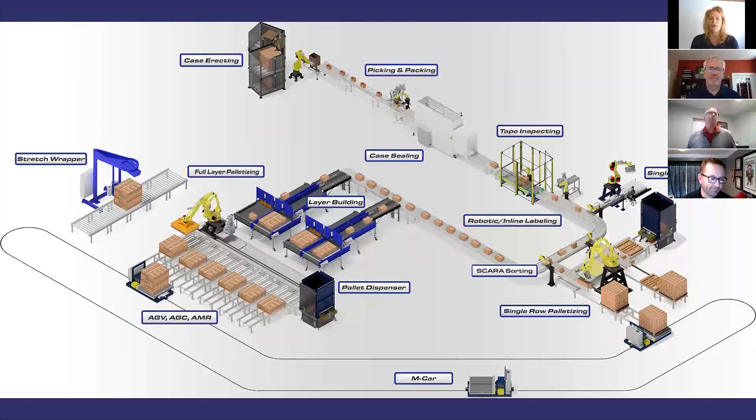I'm going to turn it over now to Jim Skelding, and he is going to explain exactly what end-of-line solutions are. Just want to start out with the definition. What exactly is end-of-line automation? End-of-line automation is the assortment of machinery, equipment, and software that are integrated to complete the shipping package before the final transportation of the goods. Typically, the process begins immediately after the individual product is made, filled, or converted.

Available on our website at Motion Controls is this interactive web page that you're seeing on the screen. We're going to start up in the left upper corner. We start out with robotic or traditional case or carton erecting, then go to each picking or case packing, then do case sealing. From there, you'll see our patent-pending robotic tape inspection, inline case labeling, or check weighing. And here is where any other quality control or customer-specific processes could be implemented.

From there, we show a single line palletizer cell for one product, one pallet, robotic case sorting, single row palletizing with pallet dispensing. Following through to the center of the screen, you see another complete system where we have full layer building and palletizing with a palletizing robot on a rail that allows us for multiple palletizing positions and sorting by SKU or order. Finally, the pallet loads you'll see are shown being transported by several different vehicles: AGVs, automatic guided vehicles; AGCs, automatic guided carts; and AMRs, autonomous mobile robots, which allow you to transport the pallets or the unit loads from the pallet wrapping system then out to the shipping docks or into the warehouse. Any or all of these solutions can be integrated into your process to increase throughput, eliminate labor issues, and reduce costs.

So now I'm going to turn it over to Earl for our first topic. Go ahead and take it away, Earl. Thanks, Jim, and thanks everybody for joining us. Just looking at the list of attendees, I see Riz is out there. You better be nice to me. This is my first webinar. So yeah, let's get on with it.

First thing we're going to look at is a trend that we're seeing more and more of, and it's basically a way to increase the utilization of robots, specifically palletizing robots. So we've got these multi-use robots that are not only palletizing finished cases or bags or product, but also doing some upstream work. In this case, we're handling rolls off of a winder, moving blanks into a box folding station—some automation that we've designed and built—and then placing the roll into the box. An optional tape roll can be added to the package.

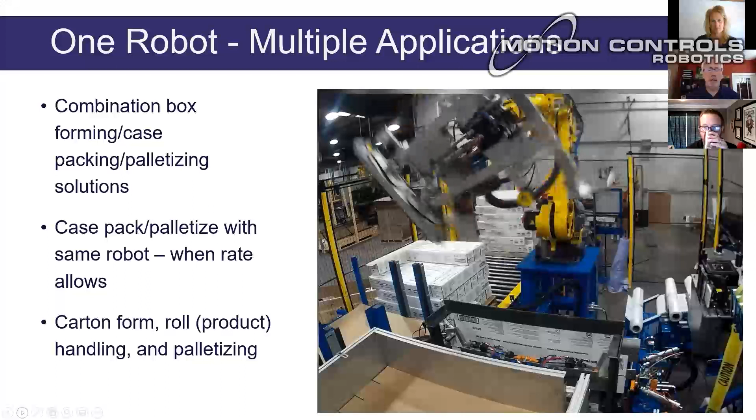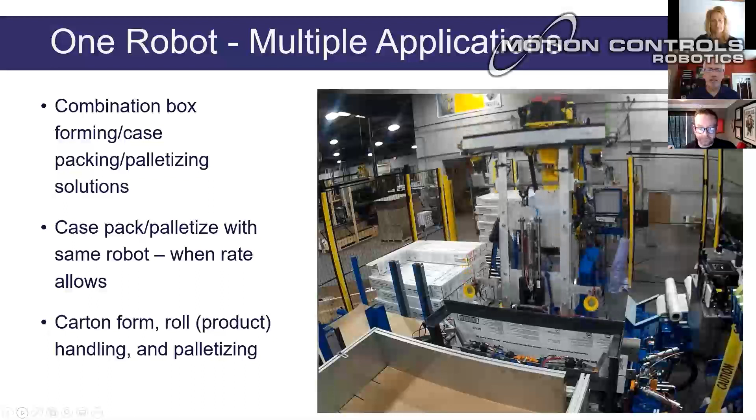You've got a multi-purpose end of arm tool that can handle blanks, handle rolls, and handle the finished carton. So when cycle time allows for it, we've got the ability to use that robot for multiple purposes. I think this takes some design and some thought, but we're going to be seeing more of this type of thing in the future.

Tray erecting, as the big box stores are demanding point of use or point of sale packaging right off of pallets. We're seeing more and more where our customers want to have trays built, or pallets built with trays and tier sheets. Here we've got a robot that can build the tray and then go ahead and stack product into the tray.

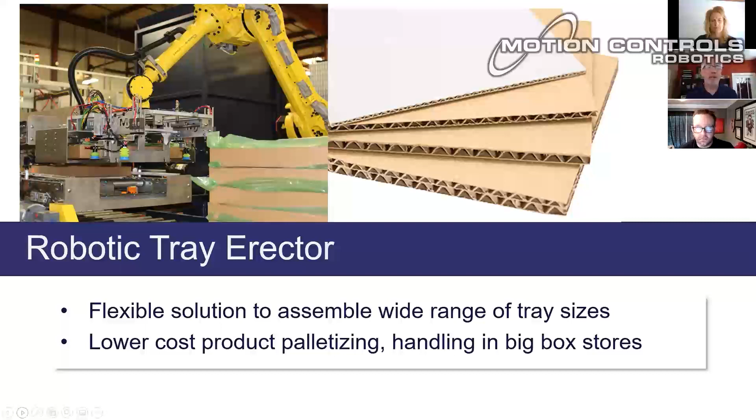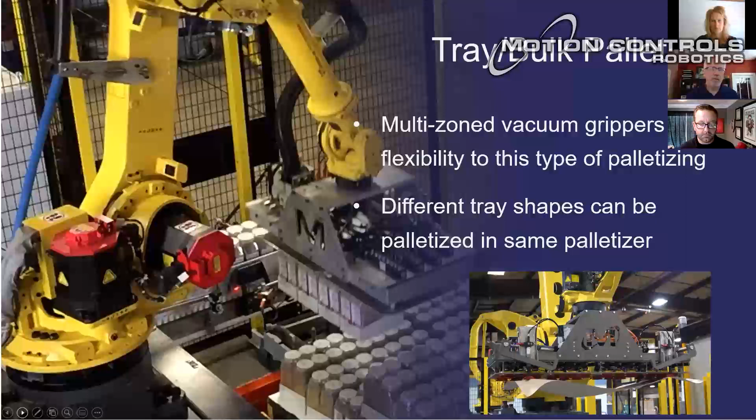Along those lines, for flexible tray packing, we've been designing end of arm tools with zones on them. The zones allow different configurations of product, pre-wrapped product, to be packed either directly onto tier sheets or onto larger trays. In this instance, this robot has the ability to handle 2x4 product arrays, 2x6, 3x4, 3x6. So depending on what the product is, the robot can be easily switched over from one configuration to the other.

Modular palletizers, we're seeing more and more of these. You might be seeing some advertising coming out recently with collaborative robots in very small, tight palletizing cells that can be moved around from station to station. Very nice little niche solution.

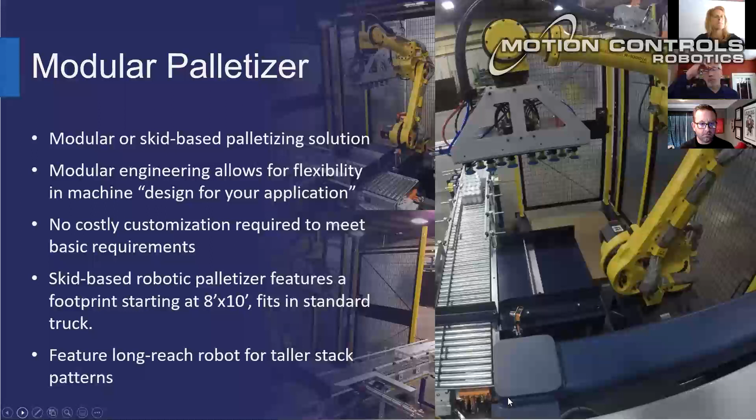These smaller, simpler cells tend to be limited in their capabilities. So you typically have lighter case loads, less variation from product to product. But in a really simple, elegant solution, these could be built onto an 8x10 or a 10x10 platform and then moved from line to line as your production needs require.

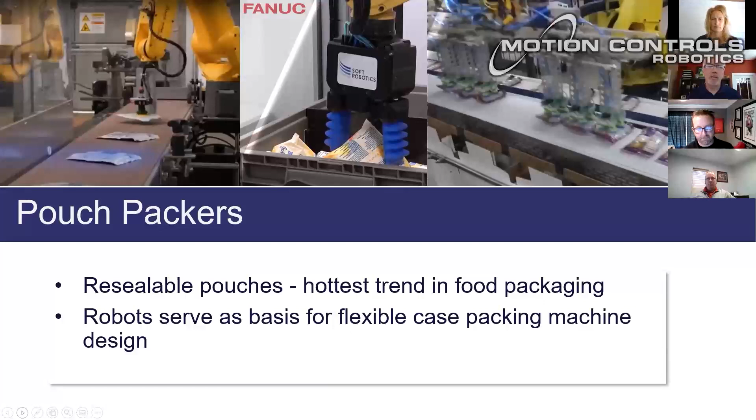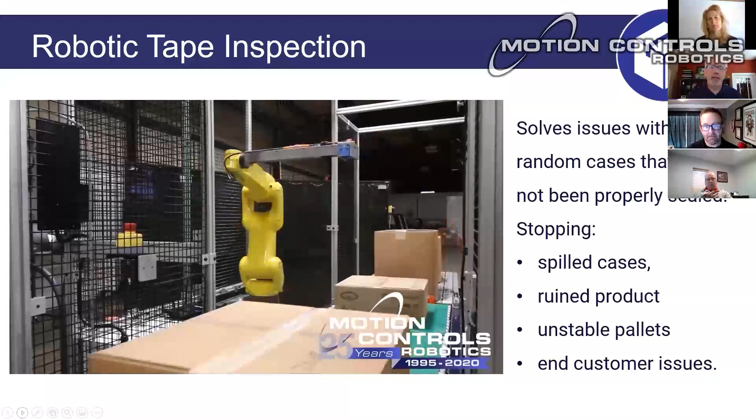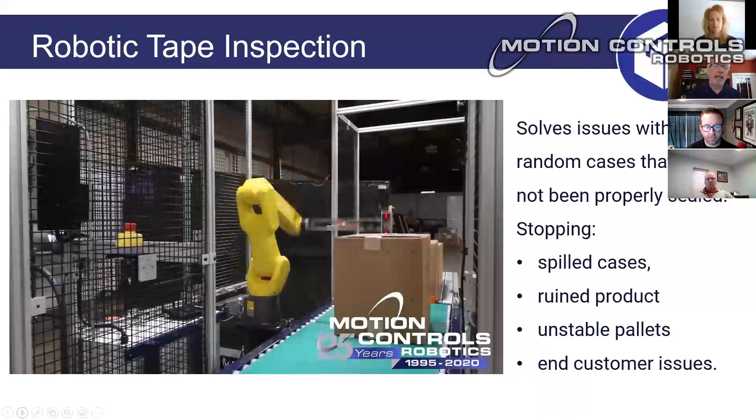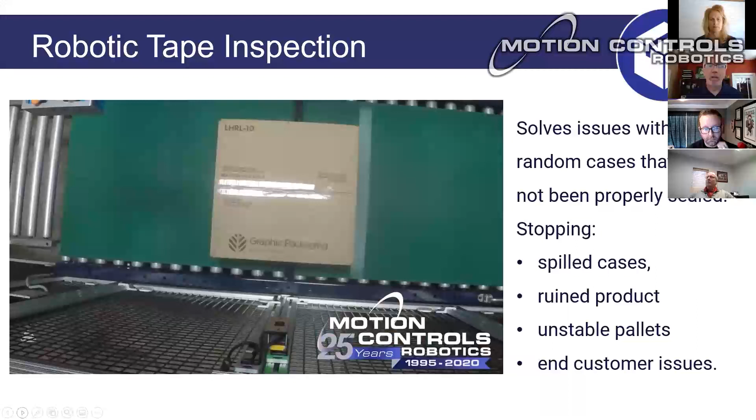Robotic tape inspection. We're going to be talking about central case packing here in a moment. One of the issues that has been a challenge over time have been cases that get to a central palletizing area from the production area with bad tape. Tapers are reliable, but they tend to have issues. They run out of tape. Occasionally they get gummed up, that sort of thing. So the worst thing that can happen with a central palletizer is to have one of these boxes come open, and then you've got a mess that stops your palletizing operation.

So here we have an inline robotic tape inspection process, very high speed, that watches for case orientation, and can check for presence of tape on both the bottom and top of every case that comes through the system.

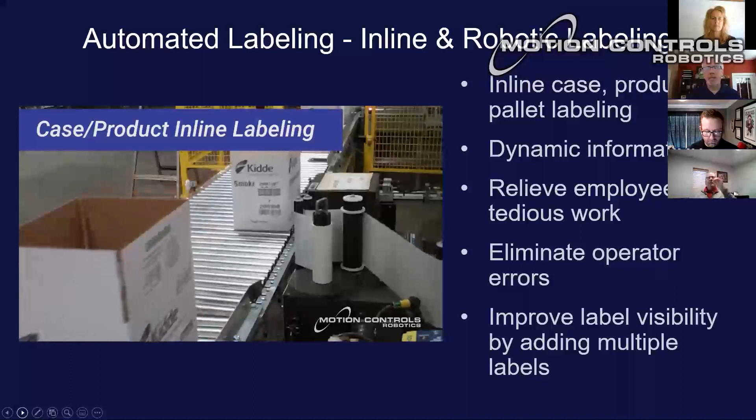Automated labeling, tremendous amount of activity happening in this area. Incorporating automatic labeling into a robotic palletizing cell or any type of robotic automation is pretty straightforward, and has helped our customers with 100% traceability and accountability for products being made.

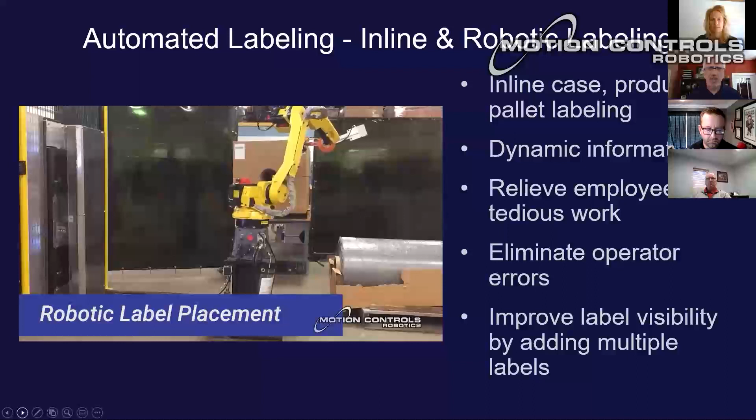In this instance, we're palletizing both boxes shown there, and then these rolls shown in the lower right. The same robot has the ability to go to the inside of the roll and places a label inside there.

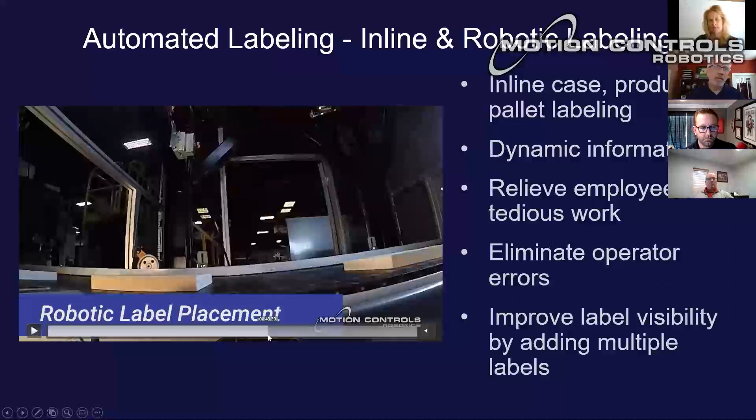And then if you could hold that just for a moment, Nicole, I don't know if you can go back or not, but the previous slide had an application for the previous video, high speed print and apply, and we're hitting upwards of 80 labels a minute on product going by that we're tracking visually.

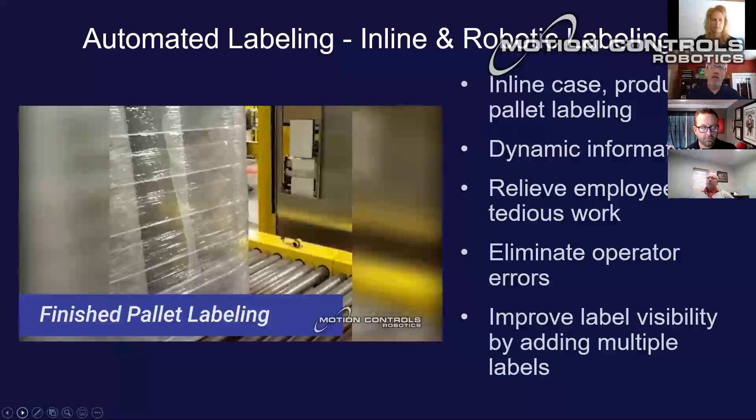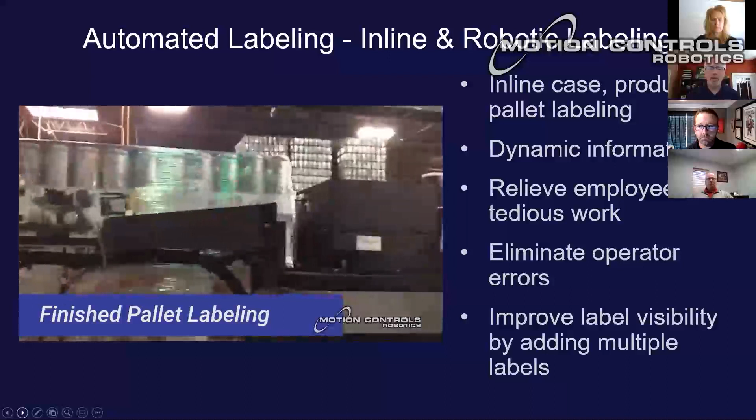Additional finished pallet labeling, again, all geared towards 100% labeling a product, eliminates operators, eliminates tedious work, errors, and so forth. Very high reliability operation with the automated labeling.

This is back to that high-speed labeling application. Here we had a customer with a very specific requirement for label orientation and location on a product. So upstream of this, we locate the product, then we print the specific label for that product and place it in the right place and to very tight tolerances.

So this was a consumer goods manufacturer, electronics, you might take a guess at, and they were thrilled with how accurately and how quickly we could get the labels on, and then verify that the label was there and that the label had the right content in a downstream vision operation.

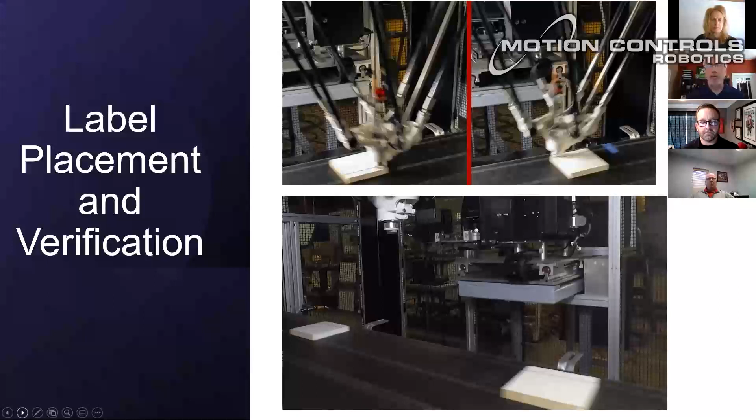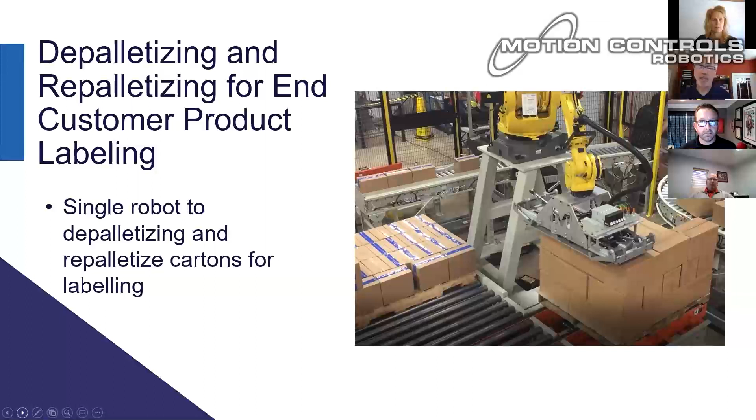Depalletizing and re-palletizing, again, getting more use is a trend we're seeing more and more, getting more use and utilization out of a robot. We have the ability to depalletize and re-palletize for specific orders and customers. And in a number of cases, customers have asked us to break down a pallet, apply labels to individual cartons, and then re-palletize for end customers. This is related to the online sales business that's been happening.

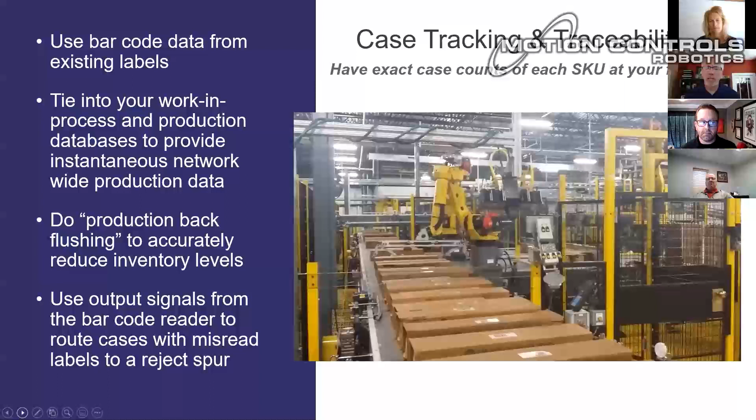Case tracking and traceability, mentioned this a little bit already, but again it's a natural fit for robotic palletizing applications. In this instance, we're using both Cognex and iRVision to track individual cases and locate them on the conveyor and feed information to these robots so that the correct robot knows which product to bring into a palletizing station.

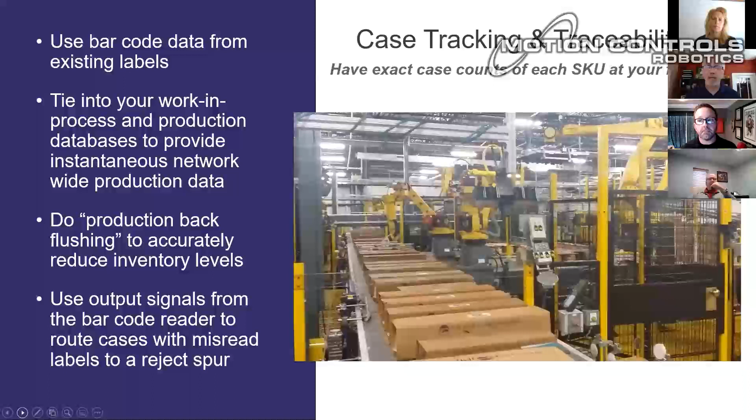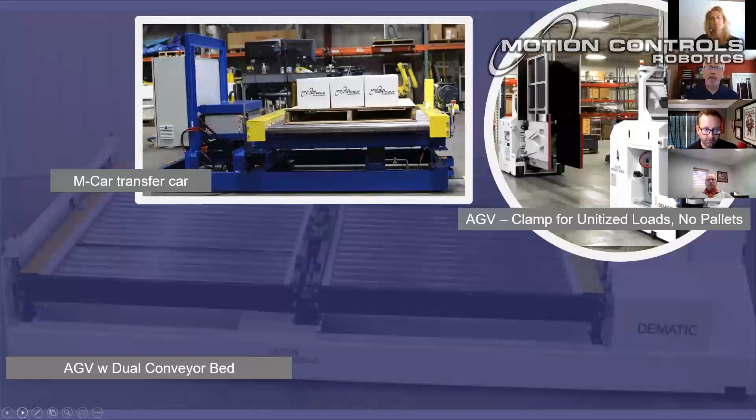Automatic guided vehicles - I want to talk about this a little bit. There's a new buzzword, AMRs, or automated mobile robots. As far as I'm concerned, these are all automatic guided vehicles. Back when laser guidance first got traction in the late 80s, early 90s, that group of suppliers wanted to call them LGVs instead of AGVs because they were laser guided. These new AMRs are vision-based and more slanted towards software layout rather than physical layout. But at the end of the day, they're automatic guided vehicles. So I just want to step through these real quickly.

The base T car, transfer car, has been around for ages. It runs on a rail, connects conveyor. The M car is a variation we've come up with, a derivative of a smart cart - a Jervis B. Webb automatic guided cart, branded as a smart cart. We have taken that and replaced the T car in many instances with a vehicle that has simple controls but can go around corners and turns rather than being tied to a rail.

The smart cart, or other automatic guided carts out there, are typically tape guided, sometimes inertial, sometimes laser guided, but a less expensive flavor of automatic guided vehicle. We're getting a lot of use in those for pallet handling and pallet transport of finished product from central palletizers to wrappers, or from wrappers to warehouse applications or warehouse areas.

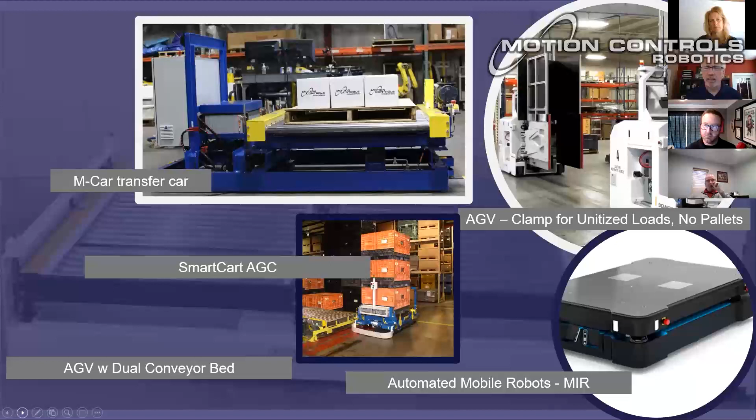And then finally, the AMRs. Again, it's a little different, a variation, but it's still a guided vehicle. And we're starting to see these - they're typically lower capacity units at this point. I expect them to grow and evolve into more full pallet handling type platforms. There's a lot of suppliers cropping up out of the woodwork, but I believe they will sort themselves out, and we'll probably see the traditional AGV suppliers that are out there today absorb this type of technology.

Sorting and layer building - I'm going to hand this off to Jim. He's got some words to cover on that.

All right, thanks Earl. What I'd like to start out with is an MCRI case study we did recently for a food and beverage customer. The challenge was a sort at high speed of wrapped products coming out of a flash freezer in a cold room environment, in excess of 75 parts per minute.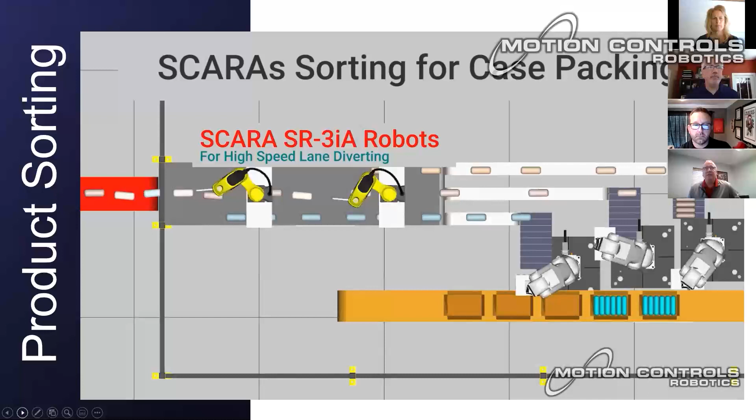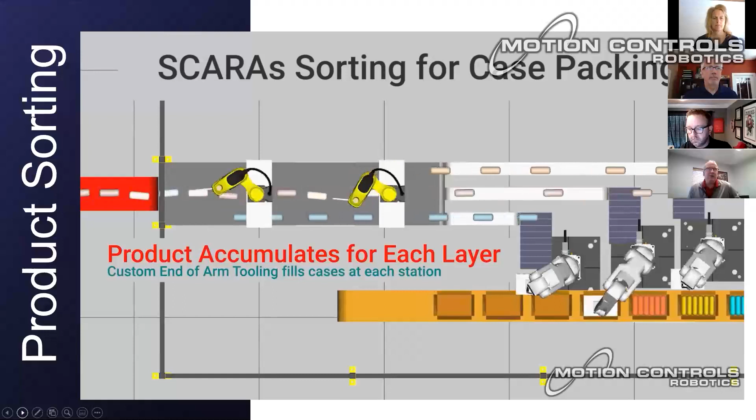Here you can see a pair of Scara robots from Fanuc that sort the product from a single mixed in-feed lane to 3 different robotic case packing lanes, each one outfitted with a Fanuc LR-Mate robot. As the products approach the Scara robots, we used Fanuc line tracking software to assign its destination and track the product travel as it approaches the Scaras.

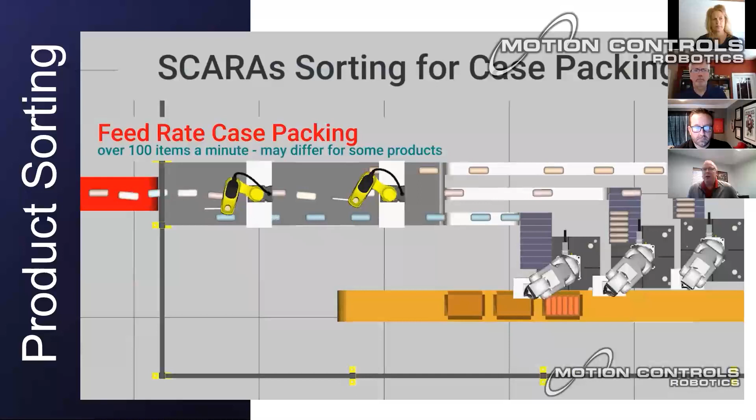The Scara catches the product with a custom end of arm tool and slides it to the appropriate product lane. The quill, or the vertical portion of the robot where the end of arm tool connects, moves up and down very quickly.

This allows us to not block the upstream product headed into the robot. At the end of the sorting lane, the product is picked by the LR Mate, and then we're shingle packed in a 6x2 pattern inside the case.

Now, the lessons we learned on this was that the Scara robots are extremely flexible, reliable, and can be used at low and high speeds that require little space.

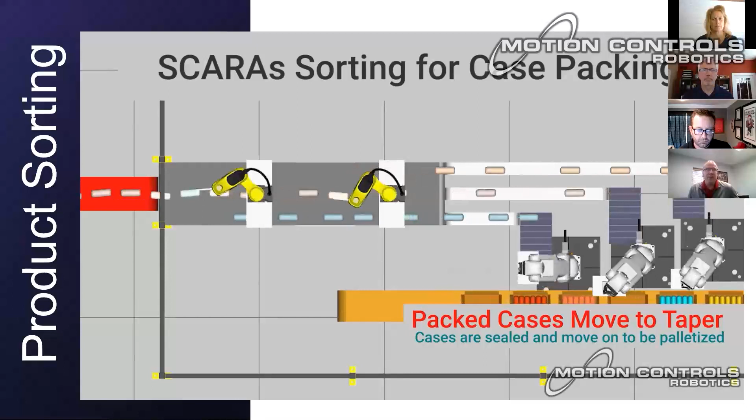The thing to note here is the Scaras are also the lowest cost robot in the Fanuc product range, and incidentally, this project is in process here at Motion. So stay tuned to our social media for videos later this summer.

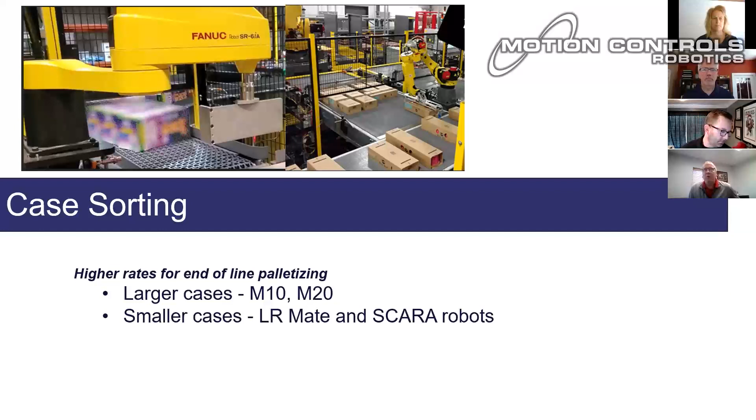Moving on to case sorting, divided into a couple of categories, large and small case sizes and weights. Typically, for the small, we'll use the Scara and the LR Mate family of robots that can achieve rates in excess of 75 cases per minute.

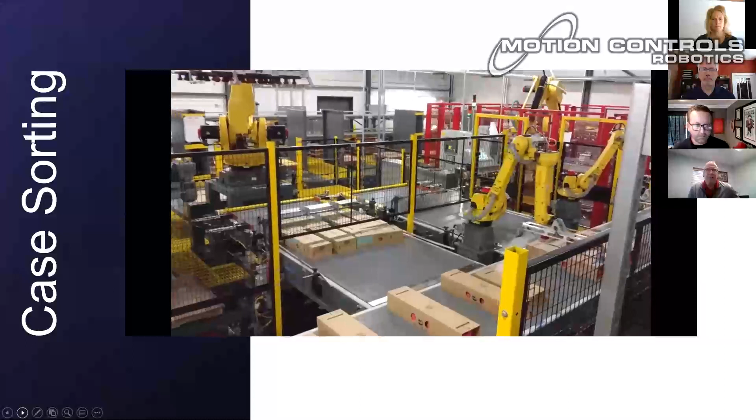The larger case sizes, as you see popping up on the video now, we use the M10, M20 family, and occasionally the Fanuc M410 110, labeled by Fanuc as the fastest palletizing robot in the world. Those range from 10 to in excess of 20 cases per minute.

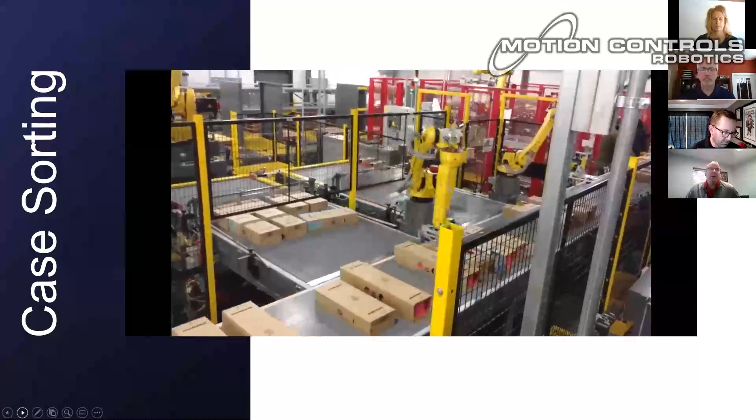What we're doing here is using a vision-based label scanning system upstream of the palletizer that scans each case, which tells us two things. It first tells us which lane it's going down, so the correct sorting robot can pick it off of the main feed line.

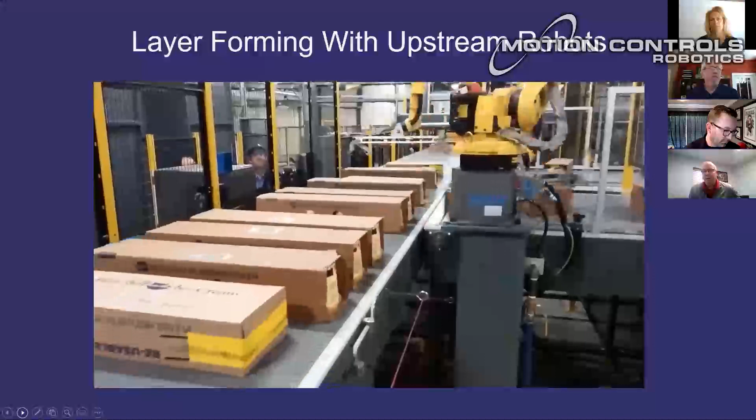There you saw the layer get released and then go into the palletizing robot, where it's picked and palletized in the appropriate station.

Okay, in our traditional layer building, in the picture, we'll let this loop through a couple of times, but in the picture in the lower section you'll see the front half of this. Traditionally, layer building devices that are non-robotic require bump turns, Intralox-type conveyors, and other mechanical devices.

More times than not, these require additional floor space, and with a wide range of case weights and sizes, can sometimes cause problems when there is a need to reorient or transfer the cartons prior to palletizing.

In the video, you see the operator use the HMI to designate the layer pattern to be run on the system. This system, which we'll get to a little bit later with more videos, is a 4-in, 4-line-out palletizing setup, so it can handle 4 individual SKUs at one time and palletize 4 pallets at one time.

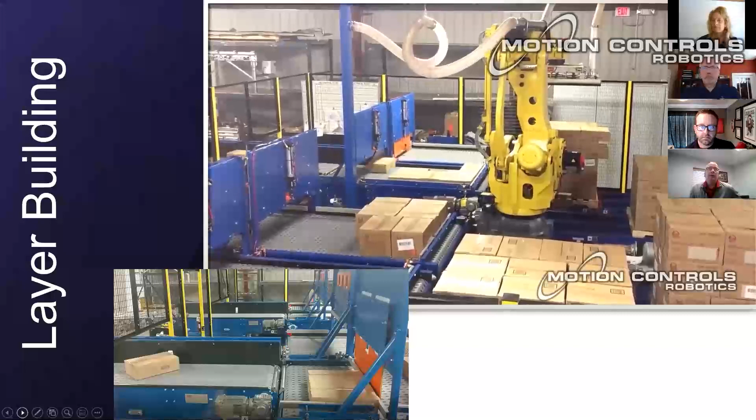So as you see, we utilize the M410 palletizing robot and a Unigripper full layer vacuum gripper end of arm tool.

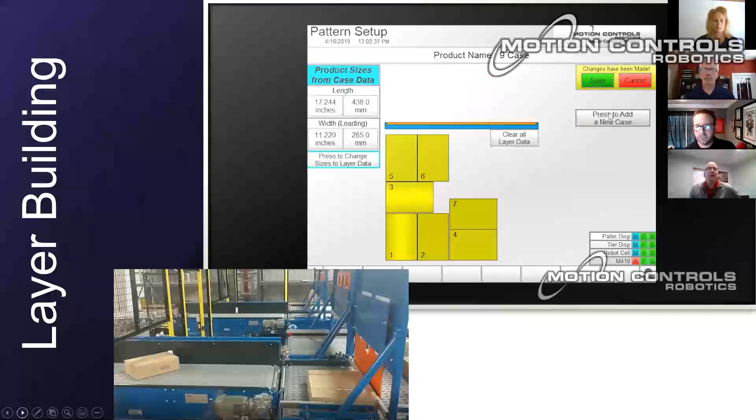Cases are manipulated with the bump turn upstream, the retractable stop, and the Intralox conveyor system builds and orients the layer in the proper position.

Then once that layer is complete, the retractable stop releases the layer, and then the robot picks. As you can see, each individual lane is identical, and we're building a multitude of sizes and shapes of cases.

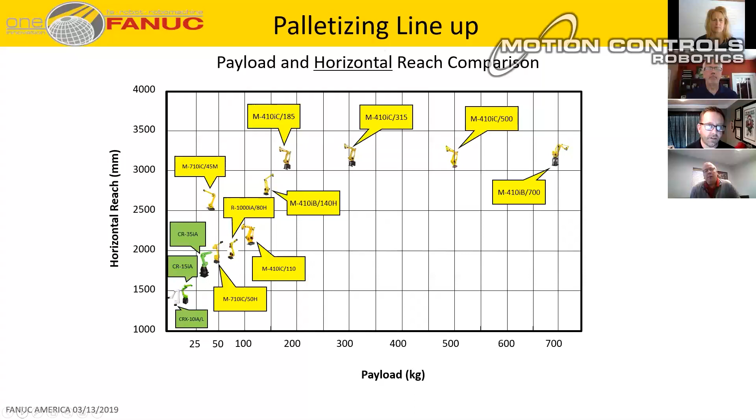So a lot of these arms are right off the shelf, standard products that we've been making for a very long time, and quite frankly, standard products that Motion Controls has been using for a very long time as well. As we move forward, I wanted to give you a brief overview of what that standard stack height looks like with regards to some of the different size arms. As we mentioned, the 185s, 315, 500s, those all have your standard 110 height.

Smaller units, not quite as high. You can offset some of that maybe with putting the robot on a stationary riser. Sometimes they need to go on a riser anyway to get over conveyance and things like that. But this gives you a feel for the wide variety of products that we have out there. These are the larger ones. The next slide will show you.

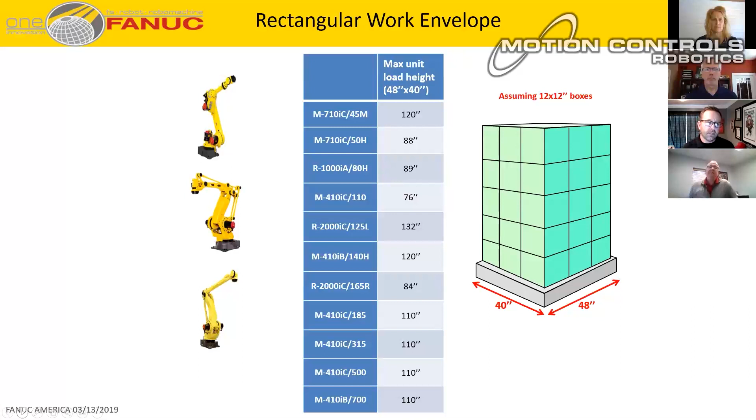We'll give you a quick rundown of the collaborative side of it. Again, everybody hears that buzzword of collaborative these days, and not everyone's really sure where to use them. A lot of end users get the edicts coming down from top down saying, hey, we got to have these collaboratives, it's all the rage, and just drop the thing in and off you go.

Sometimes that's not always the case, but the point with all of these different palletizing arms is we do have a solution if indeed it is a good collaborative operation, or if not, we've got many other solutions in what we always consider our standard yellow arms that we can utilize as well.

Just a quick rundown on this. Obviously the heights for these guys are a little bit smaller than what your standard palletizing arm generally is designed to handle. For the collaboratives, there are some different devices out there like Z-height kind of elevators that will bring the robot up and down as an aux axis to then get to that 110-inch height that you might need. But again, those are some ancillary items that you may or may not need.

That's really where your authorized systems integrator comes into play, to take a look at that application and not just jam a round peg into a square hole, but look at what you're trying to come up against, what your constraints are, and then choose one of those 20 different arms that will meet the requirements of what your production looks like.

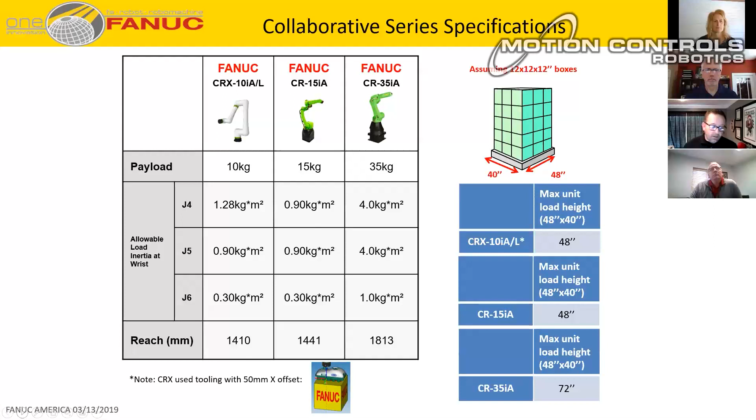A quick hitter here: up to 100 units per layer, 40 layers high, with the ability to palletize from up to 16 infeeds and 16 outs.

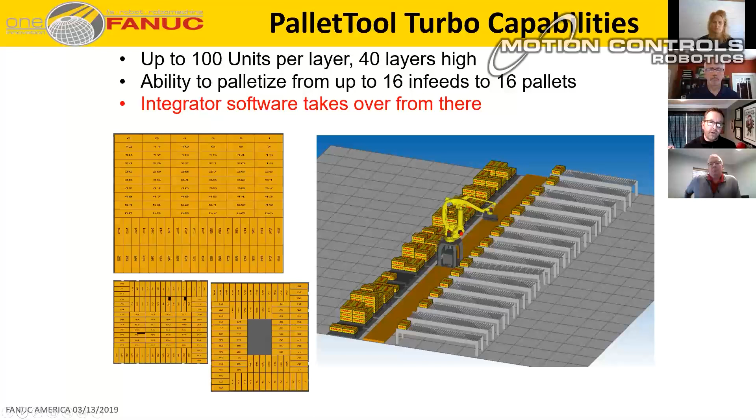That being said, there are cases where an end user has a requirement outside of those constraints. When that happens, folks like Motion Controls, who have been doing this for many years, have the capability to devise and develop their own software to meet all the requirements you're looking for. It is very user-friendly, with many tools to help you along the way, but our software always gives you the ability to customize, because not everybody has the same situation. Motion Controls has come up against those scenarios quite often where they need to utilize our software but tweak it to meet their needs, and we're fully capable of working together to do that.

Here are just a few features that Pallet Tool and Pallet Tool Turbo come with: standard palletizing teach pendant programs to get you going quickly, support for both case and bag palletizing, and the ability to create your unit loads for you. If you've got a set case size but don't already have a pattern developed for it, Pallet Tool or Pallet Pro software will develop and optimize the placement on the skid based on your sizes. It supports mixed layer or homogeneous unit loads, for easy changeover.

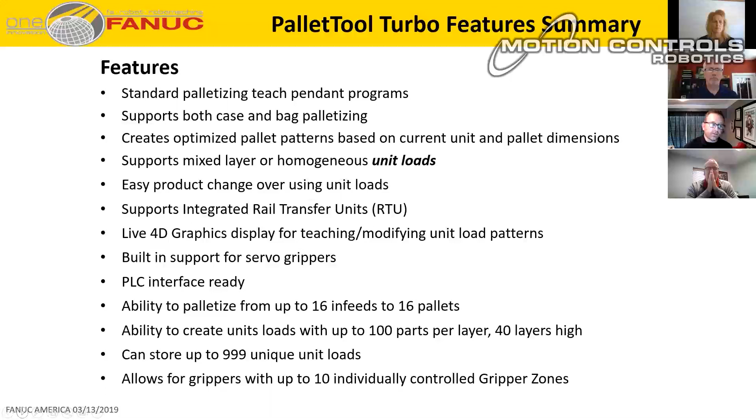That's the whole point, being able to program and take a look at what these rates are going to do and what these unit loads do. There's a live 4D graphics display on the teach pendant to give you a better feel for what that looks like without actually running through it. It also has built-in support for servo grippers, PLC interface ready, and the ability to palletize again from 16 ins and 16 outs, and so on.

So that's kind of a quick hitter on the Pallet Tool side, which is what would be running on your robot. Now the precursor to that, and really what makes for a good palletizing system, is doing your homework. Just like any other project, whether a home project, something at school, or a robotic project, you really need to do your homework up front to make sure you don't get yourself into a jam down the way.

You certainly don't want to be in a situation where you take all this time, money, and effort to install a system, and it gets there and you're like, oh crap, this isn't going to reach, or it's not going to make rate, or the payload is far exceeding what we anticipated. What you can do is utilize our simulation software. We live and die by it at Fanuc. I know Motion Controls does a tremendous amount of work with it, and it gives you the ability, before you spend a dime on anything, to validate throughput.

Take a look at your duty cycle. Not everybody takes the time to understand the duty cycle of what the arm can handle. It might be able to handle the payload, the reach, the throughput, but depending on those positions and what that movement looks like, you may be far exceeding the duty of the arm, which can quickly degrade its life cycle or longevity between preventative maintenance schedules. If you don't look at that duty cycle and understand what it's doing to those motors, you might get down the path and realize this thing isn't going to last the 20, 30 years it should. So we can take a look at all of that.

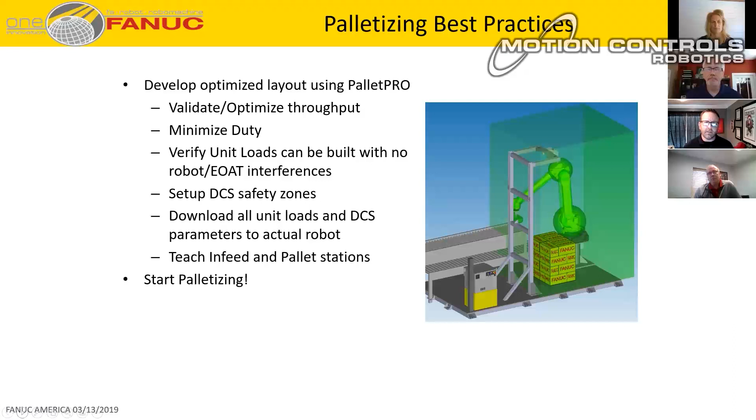Thanks very much, Josh. And a thought occurred to me as Josh was talking. So far we've been referring to cases and case palletizing, and to a smaller extent bag palletizing, but really anything that needs to be placed in an array that looks like a pallet - it could be very small components, could be large items - can be handled with this PalletPRO and PalletTool set from Fanuc.

So I would say, we're talking about cases, but we've got a tool set here that can be used on very small robots, very large robots, small product, large product, everything in between.

We're going to look at some different palletizing configurations, and try to get a better handle on what thought process we go through at Motion, and what thought process an integrator will go through when we assess these projects.

So let's talk about a little bit more in depth on why you do one versus the other. The pros on the single line palletizer are that you've got a very scalable, modular system that can be easily scaled. You can start out with a single palletizer and grow as your throughput grows, at a relatively low incremental cost. If you don't have the production needs for a 4-line palletizer, obviously you don't want to buy a 4-line palletizer.

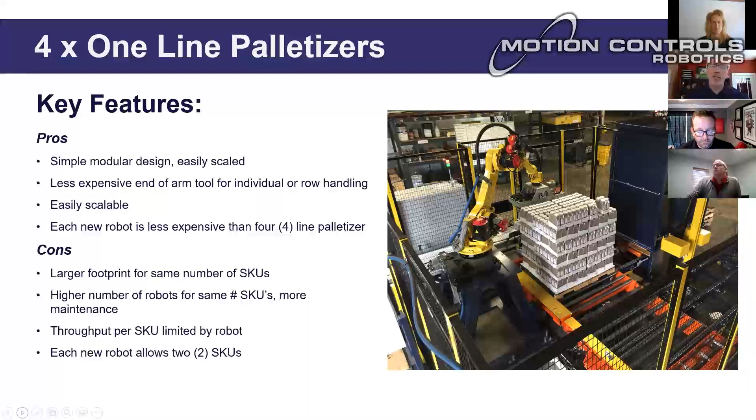Can we go to the next slide? So on the single 4-line palletizer, again, the advantages here, typically you're going to be looking at less floor space to accommodate the 4 lines. You're going to have higher case rates.

What's going on in this particular palletizer is that the palletizing, the layer forming, is happening upstream, which takes the load off of the robot. So now I can handle full layers at a time and get more production out of a single robot. The robot itself is going to be more expensive, and the vacuum system is definitely a power drain on something like this.

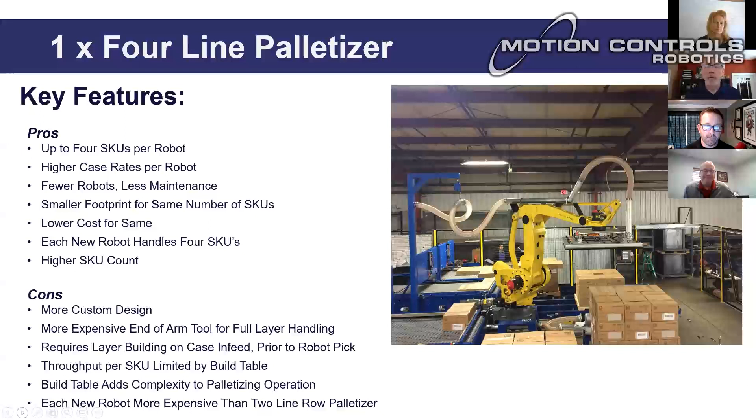Arguably, there's more complexity to this sort of palletizer than the individual four lines of single line palletizers. So again, pluses and minuses. Any integrator is going to look at the mix of your SKUs and the throughput. When I say SKU, I'm talking about stock keeping unit, a particular product being palletized. The integrator looks at a balance between the number of SKUs and the throughput for those different SKUs.

There are actually configurations where pallets can be arranged in a radial pattern around the robot. So instead of being linearly oriented to run straight away from the robot, limited to about 4 SKUs, I have seen radial patterns up to 7 SKUs per single robot. That gets a little trickier in terms of infeeds and some other maintenance and access issues, but it is an option.

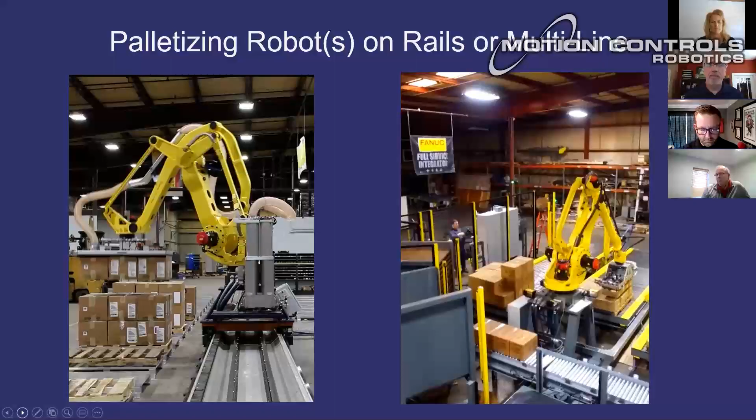So we've got these tools, and we can employ them based on what the specific requirements are. We're going to look here at central palletizing, and the basic idea is bringing cases or cartons in from around the plant into a central palletizing area. Go ahead to the next slide.

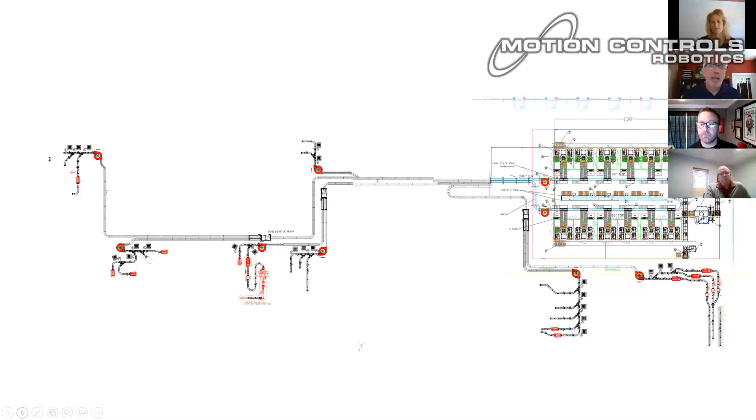In this configuration, this is set up as a scalable system, so SKUs can be added. Basically, if you carve out the floor space and don't need all of these palletizers right up front, you can add them incrementally. In this instance, we've got 2 lines coming into each palletizer. That's the basic configuration.

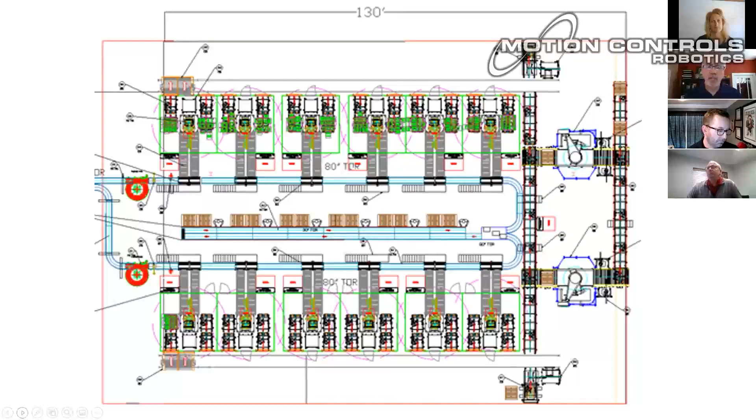You say, well, why would you do this? In this instance, the customer wanted to run up to 24 SKUs at a time, but there was a real wide variation in SKU throughput. So rather than building a whole bunch of expensive layer building palletizers and having more throughput capacity than we really needed, or rather than having the 12 individual robots with excess SKUs but maybe not enough capacity, we came up with this hybrid system.

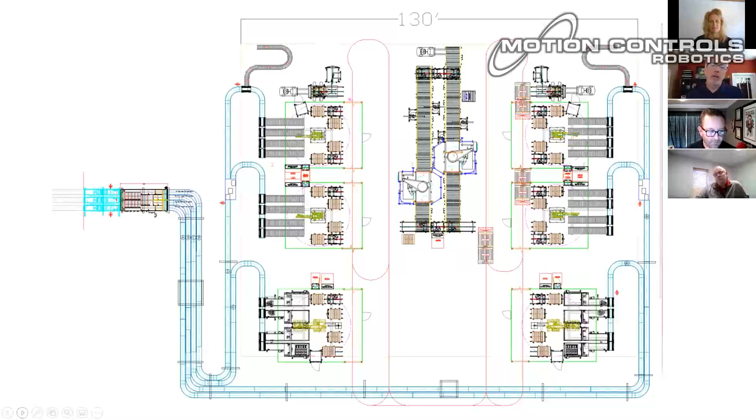The hybrid gives us the benefits of high speed for specific SKUs and a little bit lower throughput for some of the other SKUs. Upstream, there is this switch system that allows us to route cases from any line out on the floor to any of the SKUs, depending on the production rate for the particular SKU.

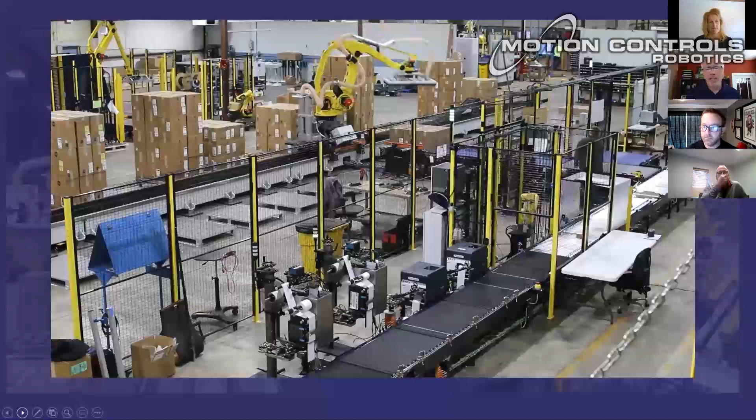Just to reiterate, if you could, Nicole, maybe jump back to that previous slide for a moment. Again, just to reiterate, here's the 12 robot solution with the 24 SKUs. Actually, this is going to take more floor space and be more expensive than that hybrid solution I showed you in between.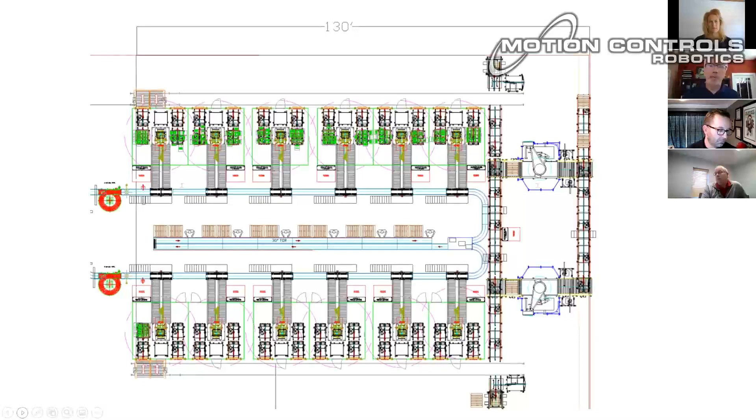Now go ahead—I just wanted to show you what the robot on a rail looks like. Generally, if you can get away with 2 or 3 palletizing robots, you're going to be less expensive than the robot on a rail. You need 7, 8 or more SKUs with relatively low throughput each to have it make sense to add the cost of a rail. The rails are somewhat expensive, but as soon as you get past that point, the robot on a rail can become more cost effective for you.

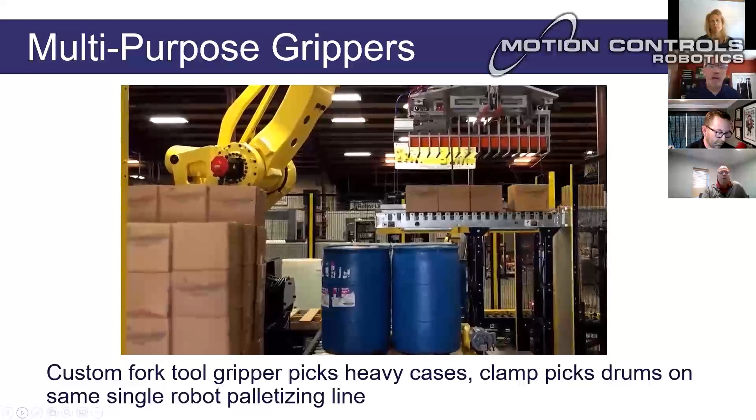We'll take a quick look at different palletizing tools. Just to give you an idea, a robot palletizer doesn't have to palletize just one product. Here we're handling cartons and drums in the same system. Next.

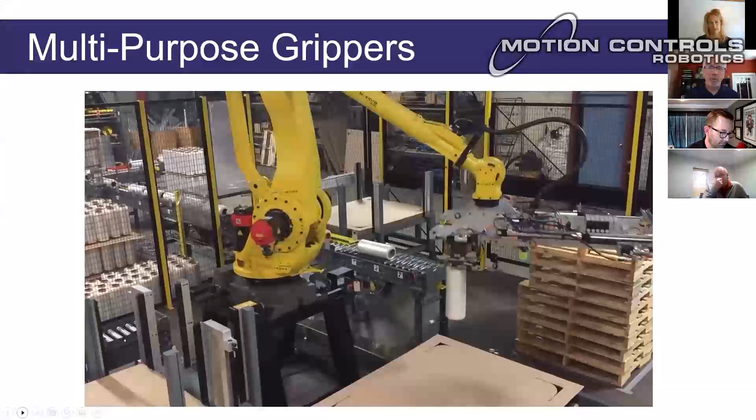Here, end of arm tool can handle pallets as well as tier sheets and these rolls that you see on the infeed conveyor. Towards the end of the video, you'll see the roll get picked up by the robot with another appendage on the end of arm tool, flipped down and stacked onto a pallet. Pretty nifty end of arm tool there.

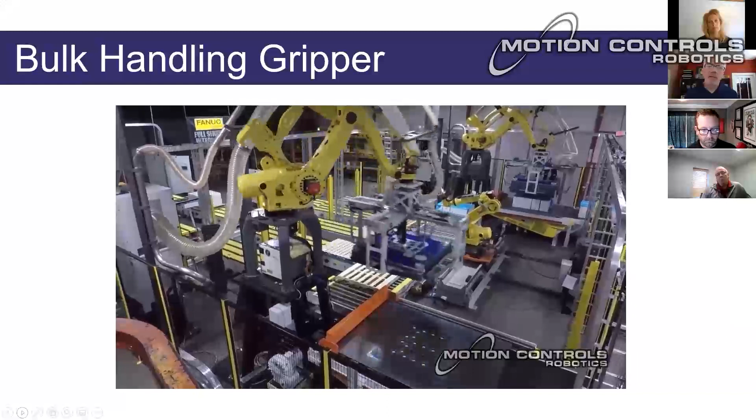Here's a very sophisticated end of arm tool, actually built by Schmalz. We work with them on a number of these projects where we can pick a full layer of virtually any product. As long as the SKU is the same per layer, we can handle pallets that have mixed layers on them. The use here is to take bulk pallets coming into a distribution center, breaking them down into individual layers, labeling the product, and getting ready to send out and re-palletize downstream for either individual stores or other distribution centers.

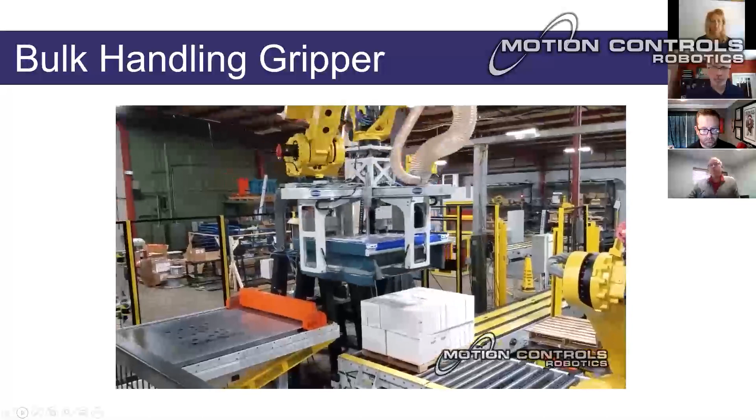Here you see that same tool setting the product down on a stripper table. If there's a tier sheet, we'll push the product off the tier sheet and then go get that tier sheet and put it in a dunnage stack.

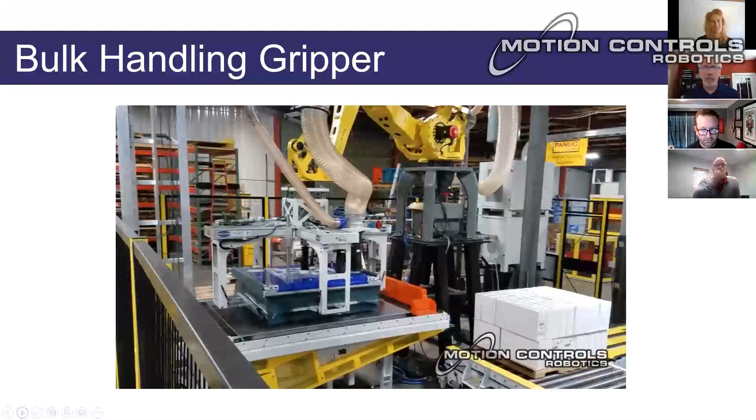This is the last slide that we have on grippers. I just wanted to mention PIAB has a new very high efficiency vacuum generator and cup combination that we were able to use in a cold room environment, which is a notoriously difficult environment for vacuum. We're just thrilled with it. Customers were handling 140, 150 pounds per pick, per robot pick, and not having any issues with drop cases, which was a problem with the customer's previous palletizer.

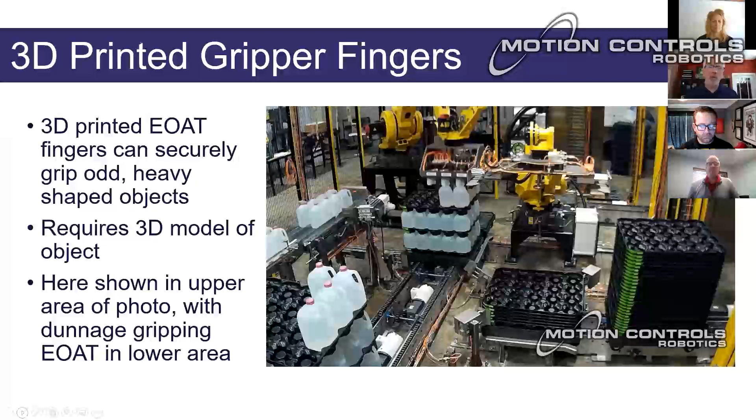I don't want to forget about 3D printed grippers. In this particular application, the customer came to us with a very weak jug, just like aluminum cans - the jug people are driving weight out of the product, making it more flimsy, difficult to handle reliably. We came up with a 3D printed gripper that very cost effectively secured the handle of these jugs so we could move them at a very rapid speed.

I'm going to turn it back over to Jim, and he's going to remind everybody what we need for a good palletizing system.

Okay Earl, thanks, that's good stuff. So I just want to wrap this up with a couple of key points that are very important to the customer integrator relationship. Just an FYI, we have an RFQ, a request for quote template, that will go into detail of all the different components we need here. Task us either with an email or put us on a chat, and we can send that to you. You're welcome to use it for your next project or just to get a sense of what you may need.

Going through these, next is project information - these are your basics. Rate in this business drives everything. Rate will determine size of equipment and the amount of equipment, so that's number one.

Product dimensions, certainly min-max sizes and weights and descriptions of the products. The packaging, the unit load requirements - these are your pallet patterns, your pallets, if there's multiples, layers, etc. Unit load requirements, which are part of that as well. Your packaging specifications - so if we're putting tier sheets in between layers, corner boards, top sheet plastic, or shrink wrapping it or stretch wrapping it.

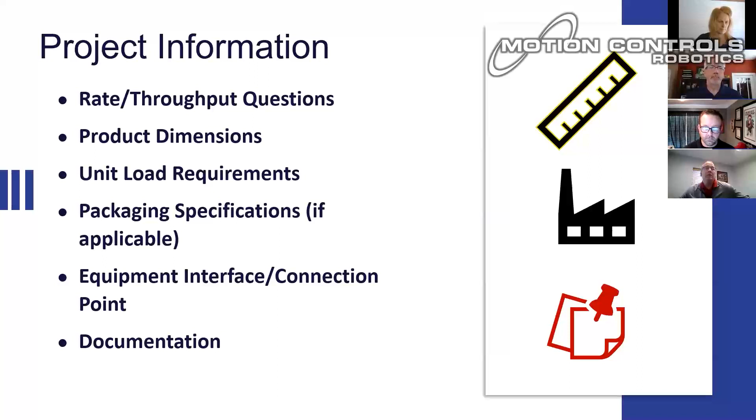Cost justification - Earl and I were talking about this when we were reviewing this morning, and customers don't want to tell you how much money they have to spend. But the reason we need to know a range is it allows us to make sure that we're providing the system and it fits into that range. We don't want to sell you more bells and whistles or include options that are certainly going to blow it out of the water - you're going to get sticker shock and move on. So that's the reason we need that, but keep that in mind, I've got something else on this in the next slide.

Basically, how you're paying for the project - headcount, labor savings, safety, or increase in production, and then of course the shutdown and the installation phase. Are we doing it all at once? Are we going to have to do it while you're running? Those are all super important when it comes to figuring out what the proposal will be.

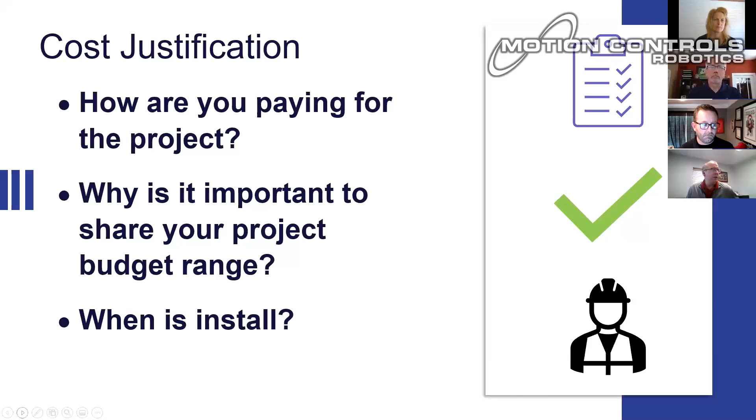Rate confirmation: make your integrator do a simulation or at least a detailed time study to prove to you that they can do 50 cases a minute, like they're saying.

Installation, commissioning, training schedule, and the warranty. What's included in the warranty, but also how many days will it take to install, how many days to commission, and how many training days will you be given?

Those are all key. The last two are certainly important too - videos and pics of their solution. If they're saying they can put a widget into a box standing on their head, but they don't have videos or pictures, they've probably never done it before, and maybe it's time to move on.

Integrator background check - this is really important as robotics in the world today become more in your face and prevalent in the market. There are a lot of new integrators out there just buying robots and trying to integrate them. So first, ask for recommendations from guys like Josh Holtzberry at Fanuc America, the OEM of the robot, and look at your industry-specific member organizations like the RIA.